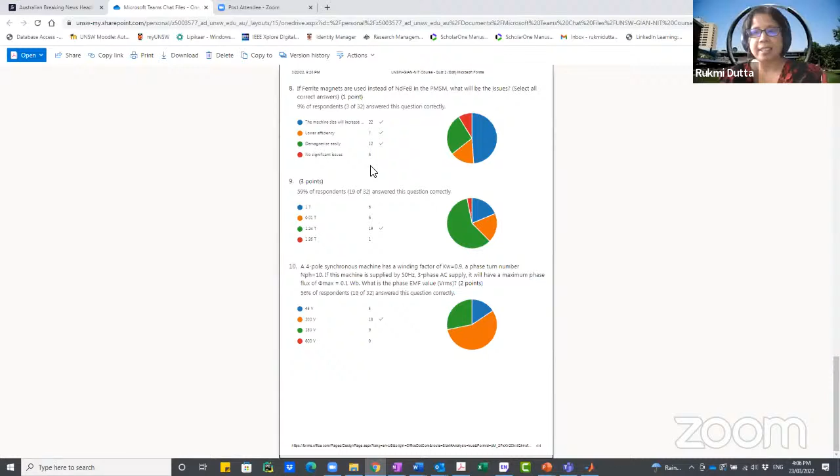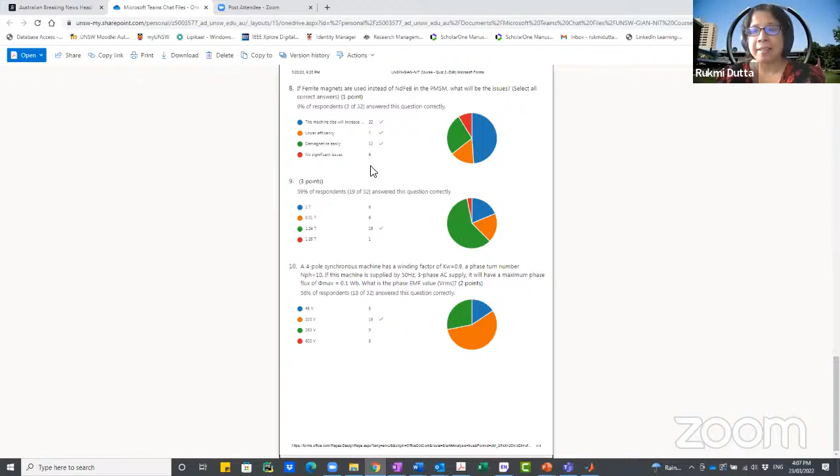Then we discussed a little bit about magnet material. Rare earth magnet material such as neodymium iron boron is expensive, and it can also have supply issues, because it is dominantly available only in China. So if we start using PM machines everywhere, rare earth material could be like the oil of the current age in the future. That's why we do not want to rely on one single country for the supply of rare earth material.

And that's why there was the look for alternatives. So one very obvious alternative could be ferrite magnet, which is cheap and easily available everywhere. But then what are the problems with it? So that was the question. So if we use ferrite magnet, the main problem will be that it has low energy density, so machine size will be much bigger.

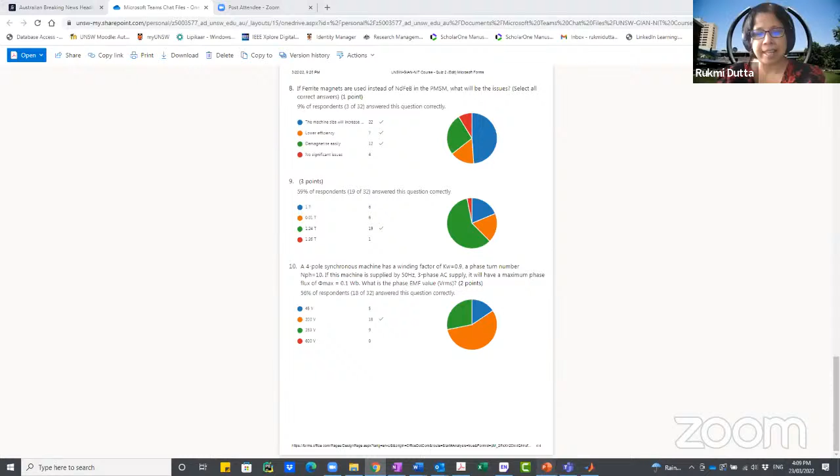And the last two questions were basically two simple numerical questions based on Dr. Clay Chu's tutorial, and in both those questions, the majority of you got correct answers. So I congratulate you. And hopefully today also we will have a very fruitful tutorial as well as lectures. So now let's go to the lecture component of today's part.

Okay, so let me start with today. We are on the third day of our course material, and this is the second part of the permanent magnet machine, where we will be discussing mostly how to design it. We'll start with some fundamental definitions, then we'll go to how to analytically calculate some of the main dimensions, and then we will go into more detail about how to do it using finite element modeling.

So in the tutorial, which will be like a finite element workshop, you will be able to maybe even use some of the concepts that you learn in today's lecture.

Madam, can I interrupt for just 1 minute? Sure. Madam, at the bottom, please see whether recording is going on or not. Okay. This recording, I think, is going on. I cannot see the recording. Yeah, recording is going on, sir. I can see recording is going on. Okay. All right.

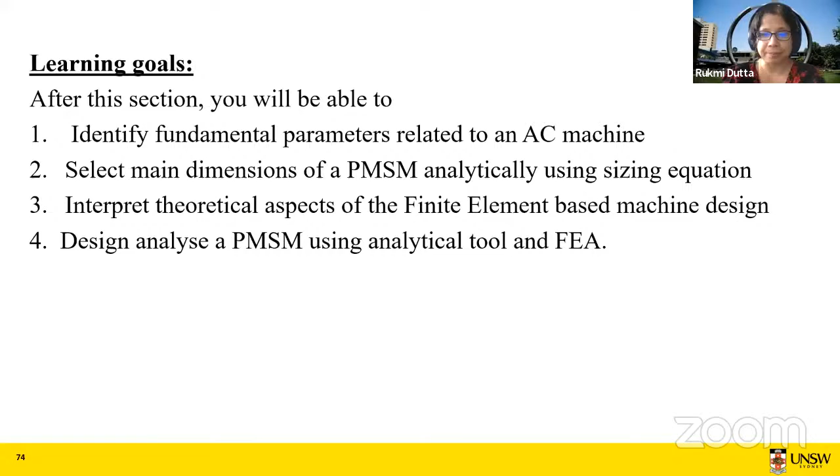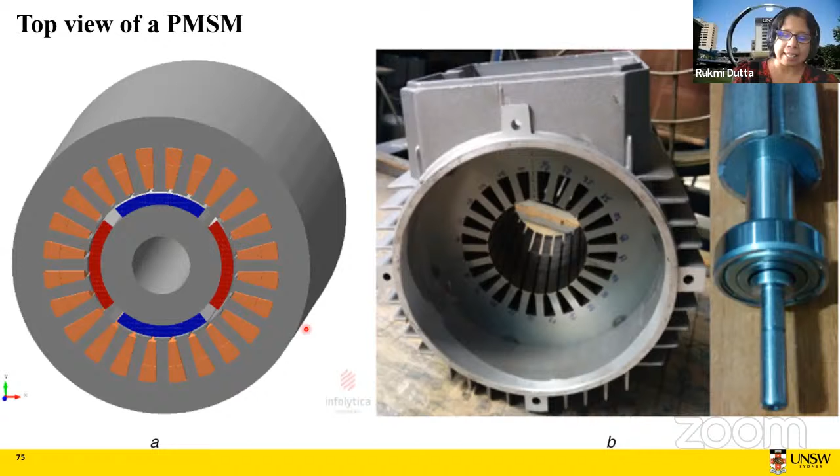So when you want to start designing a machine, the first step is to find the main dimensions, and only after that can we do anything else. The first step is always analytical calculation of the main dimensions, which gives you a very basic machine. You may use further analytical equations to calculate some performance, or you can directly go to finite element and start finding more accurate predicted performances.

Now, to build this geometry, we need to know some of the fundamental quantities and be very clear about them. So first we will look at those, and then we'll move to the sizing equation. So as I said, for the geometry, we have to define the stator. We have to draw these slots where the winding will go.

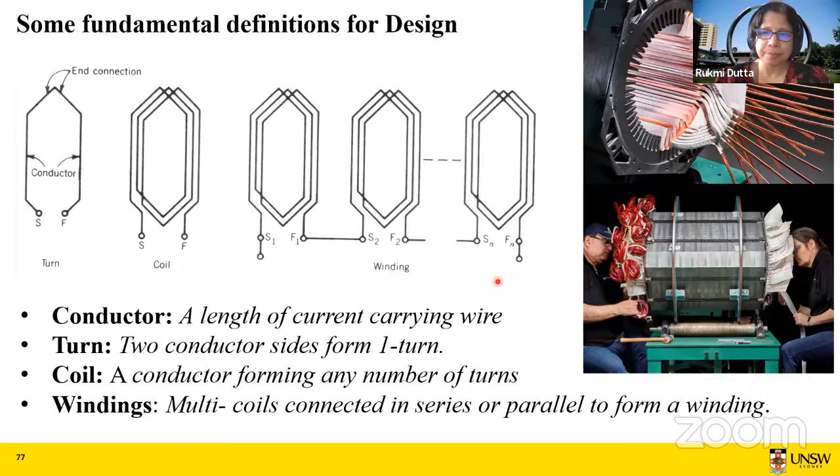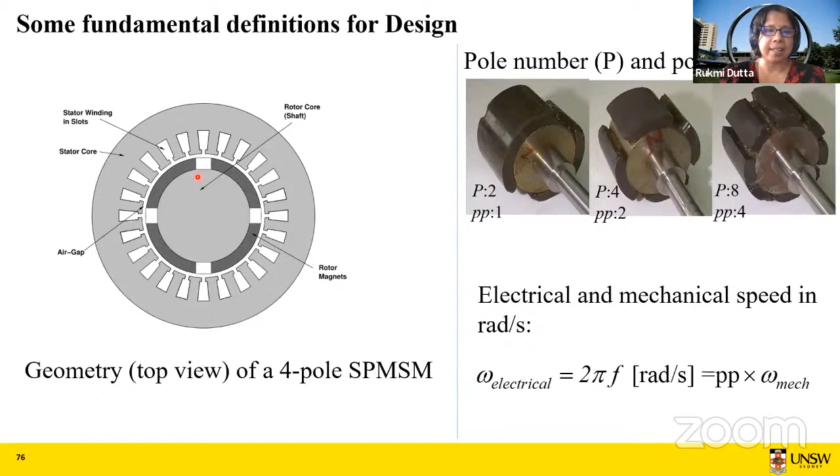And then the coil in your stator. So what's the width of your coil? That's the coil span. If the width of the coil and the pole pitch are the same, then we say that we have a full pitch coil. But sometimes having the pitch shortened is actually useful. By making it shorter, we can reduce certain harmonics in the magnetomotive force and also in the EMF.

If you remember from our last lecture, the magnetomotive force, or MMF, was a staircase type waveform, and it has harmonics. And you do not want certain harmonics, mostly the odd harmonics. Some of the odd harmonics can result in vibration and also noise. So those harmonics can be eliminated using short pitching. Of course, also using a narrower coil, we can reduce copper use as well. So that's the advantage of a short pitch coil, and it's often used for all types of conventional three-phase machines, including PMSM.

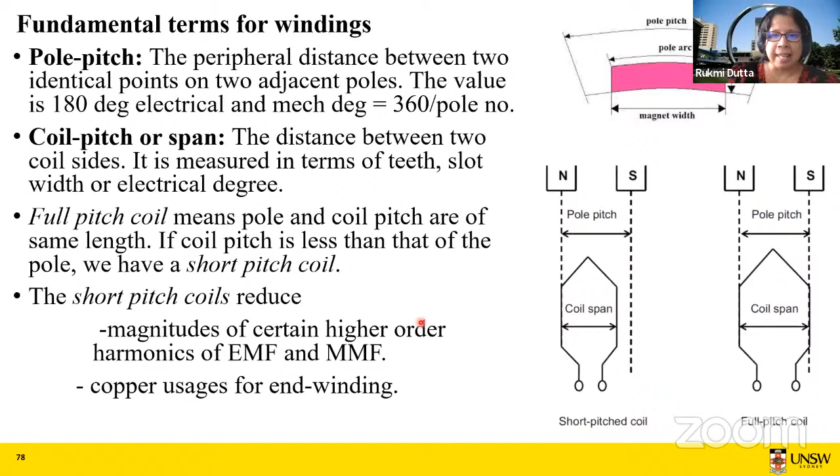So when we have a short pitch winding or short pitch coil, that effect needs to be included in our number of turns per phase, and that is defined by a factor called pitch factor. The basic definition is that it is the ratio of the induced EMF of a short pitch coil as your numerator, and the EMF of a full pitch coil. So if we take the ratio of these two EMFs, it gives us a fraction, and that's the pitch factor. So pitch factor is always less than 1.

But we may not know the EMF before we build the machine. So instead, we can analytically calculate it using a formula. This is a fundamental formula. You can find it in any electric machines book, especially the first one. We can calculate pitch factor for different harmonics of the MMF. If it is for the fundamental MMF, then h will be equal to 1. And it is the cosine function of the angle. So what is this angle? This angle gamma is known as the slot pitch angle.

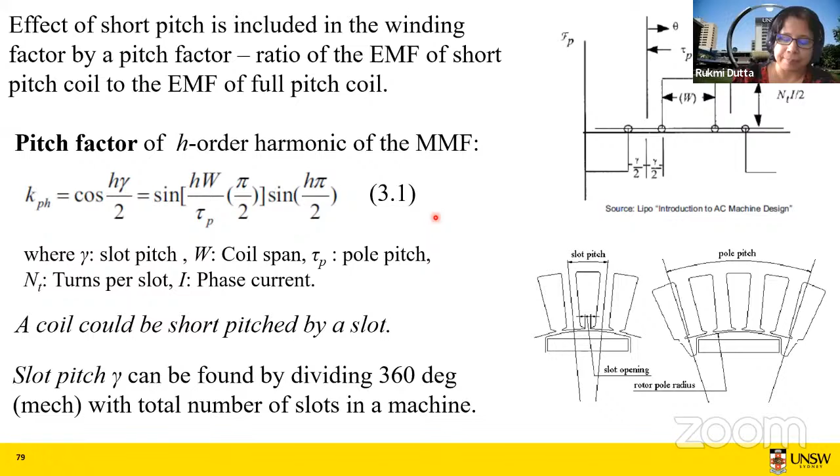The next factor, which is again quite well known, you will find it in the classical electric machine textbook. That's the distribution factor. The distribution factor comes from the fact that all our coils are distributed over a number of slots, as you can see here. This shows us the two sides of a coil, and all these could belong to one phase, and the others could belong to the other phase. So we could have many coils, as I said, and these coils could be connected in series or in parallel.

Is there any question? Hello, is there any question from your side? You please write it down. Let Madam finish, then you can start. Okay, sir. Yeah, hello. Maybe there is just background noise. It could be just background noise. Sorry? Yeah, I think he forgot to mute. So, Madam, please continue. Okay.

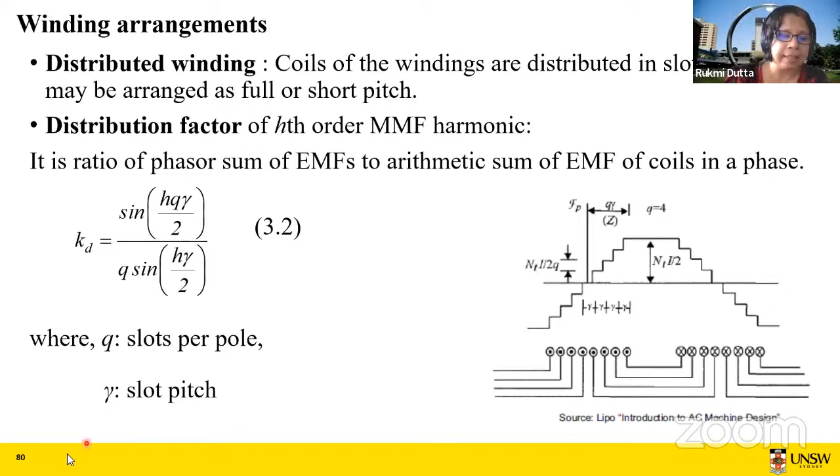So we have two factors from the winding, pitch factor and distribution factor. And then how are we going to put these windings in the slots? Based on that, we have two types of windings, double and single layer. The concept is very easy to understand. If in our slot we only have one coil side, that could be a number of conductors if we have more than one turn. If it is one turn, then it will be one single conductor. In this picture it is shown as only one conductor just for simplification. So single layer means we only have one coil side in each slot, and in the double layer we could have two coil sides, top and bottom. That's why the name double layer.

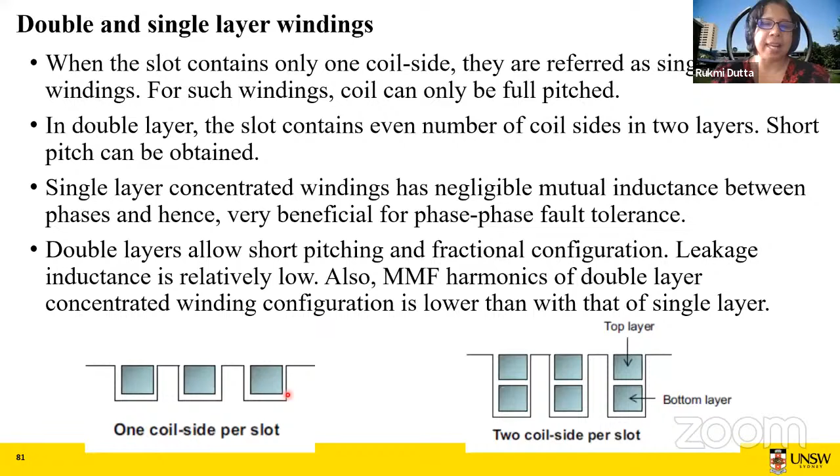For conventional machines with distributed winding, if we want short pitch, then it is a double layer winding. But if we want fault tolerance, then we may select single layer full pitch winding. So those are a few fundamental things. Now we are ready to look at the design steps.

Okay, so what is the first step if we want to design a machine? First will obviously be the application, if we are designing something novel or new. But if we are doing it for conventional applications, then the first question will be, what type of machine are we designing? Is it a synchronous machine, induction machine, reluctance machine, or PMSM or BLDC? So that's the first question we have to answer.

And once we decided what type of machine it's going to be, next we would have to look at whether we want internal pole or external pole. Here internal pole and external pole doesn't mean SPM and IPM, okay? This is a different concept. Your rotor could sit inside the stator hollow cylinder, or your stator could be inside and the rotor outside. If the rotor is outside, that's the external pole configuration.

This type of external pole configuration could be useful for applications such as a racing car, in which you put the electric motor actually in the wheel. The shape of the wheel is such that it is favorable for an external pole machine, because your rotor could be the wheel rim itself, okay, and then the stator could sit in the middle.

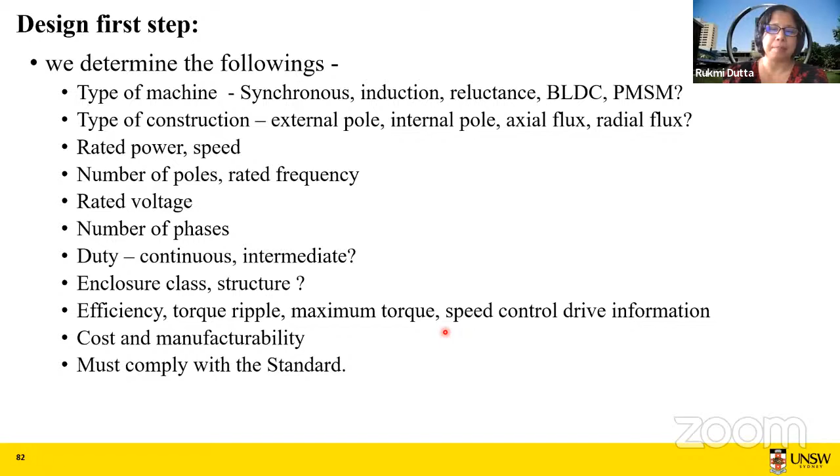So once we have decided what our motor is going to be, the next step is to determine the main dimensions. So what are those main dimensions? One of the important ones is the outer diameter. So from the center of your motor, that will be your outer diameter. And this outer diameter, if we are designing the motor for standard applications, will usually be decided by the standard frame sizes. There are different frame sizes, and that will already tell us what this diameter needs to be.

And the next important one is the axial length of your machine. We also need to know what should be the width of the slot. These are the slots, as you can see. What should be the height of the slot? What is going to be the air gap diameter? Air gap diameter means actually the internal diameter or internal radius of your stator. So here, again, you need to know what this radius or diameter is.

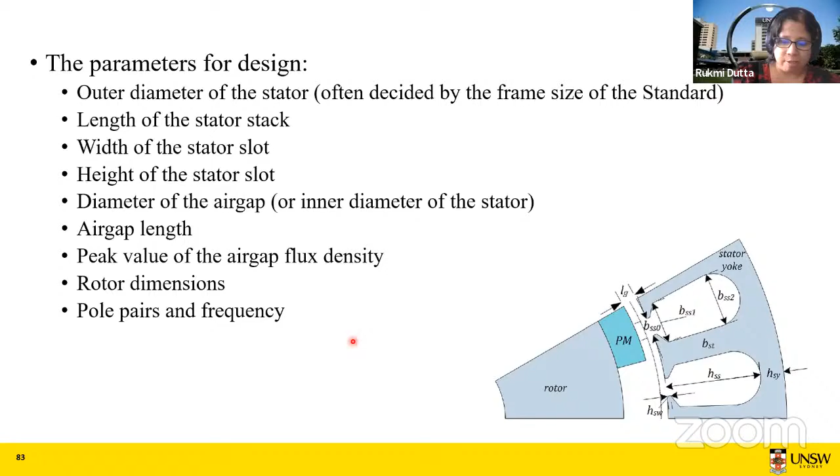So how do I decide it? There comes the concept of the sizing equation. The first step of a machine design is actually always the sizing equation. It may look like a very weird, large, complex equation, but we will break it down, and you will see that although it looks very complex, it actually comes from a very basic understanding of power and torque.

In the sizing equation, on the left-hand side we have the output power of the motor, and then some constant, the efficiency of the motor, frequency, pole pairs, phase numbers, the air gap diameter of your motor. Air gap diameter means inner diameter; we can also call it the inner diameter of the stator. The length of the motor, the air gap flux density, and this letter A represents the electrical loading.

What electrical loading means is again a quite simple concept. It means how much current per meter there is in the periphery of your stator. So if you know your total current, you divide it by the perimeter of the circle created by the air gap diameter.

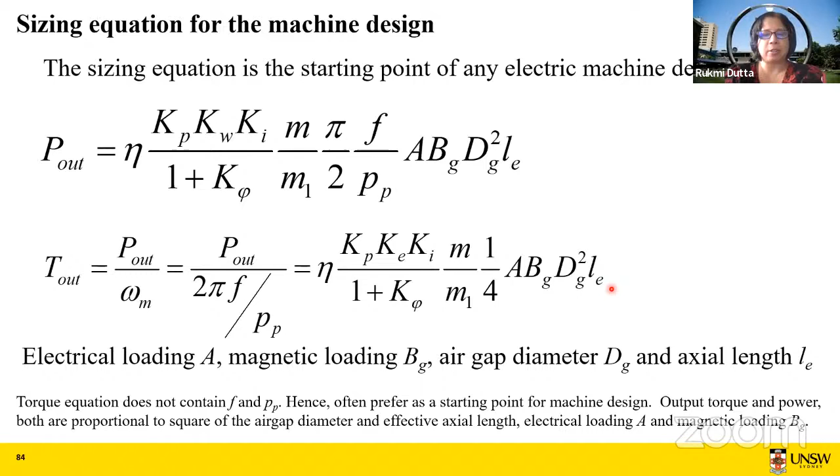So now let's look at where this sizing equation actually comes from. It starts with the very basic definition of power. Instantaneous power, as you know, is voltage times current. Now, if we consider that instantaneous power as our input, then the instantaneous input power to the motor, multiplied by efficiency, gives us the instantaneous output power.

But if we take the average of our instantaneous power, then we get the conventional power equation in terms of either RMS value or peak value. So from here it starts. With the efficiency and phase number, in a time period of capital T, we find the average input power.

In the input power equation, actually, instead of voltage, the EMF is used. So here it assumes that resistive drop or any leakage inductive drop in the machine is negligible. So it's neglected, and from there we get our power equation.

And this equation was derived in 1998 by Professor Tom Lipo, who has only recently passed away, but he was one of the pioneers in developing this equation. And this paper is available in the IEEE Xplore database. So if you are interested, you can always read this paper to understand the sizing equation in more detail.

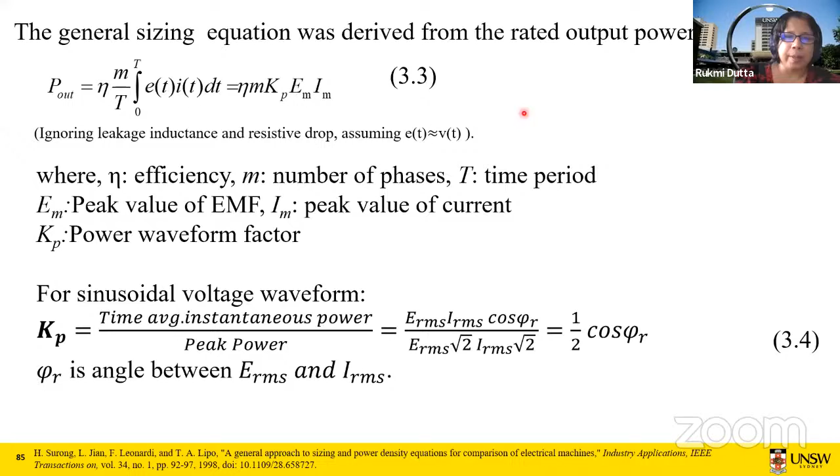So what is the induced peak EMF, and what is the current, in terms of flux density and current density? That will translate to the sizing equation. So EMF, from Faraday's law, can be expressed in terms of the number of turns in a phase winding, air gap flux density, frequency, pole pairs, and the flux is, as we know, flux density times the area.

From the concept of the area come these two dimensions, the air gap diameter and the length. The cross-sectional area of the air gap can be thought of like a cylinder with a curved surface. So that area is 2 pi r times the length of the cylinder, which is the length of our machine. So from there come these two, diameter D and length L.

And since our windings are distributed, we have to consider the winding factor. In yesterday's lecture we didn't look into what is inside the winding factor. Now we'll be able to do that. If you remember the distribution factor, which we defined previously today, and the pitch factor, those two multiplied together are the winding factor.

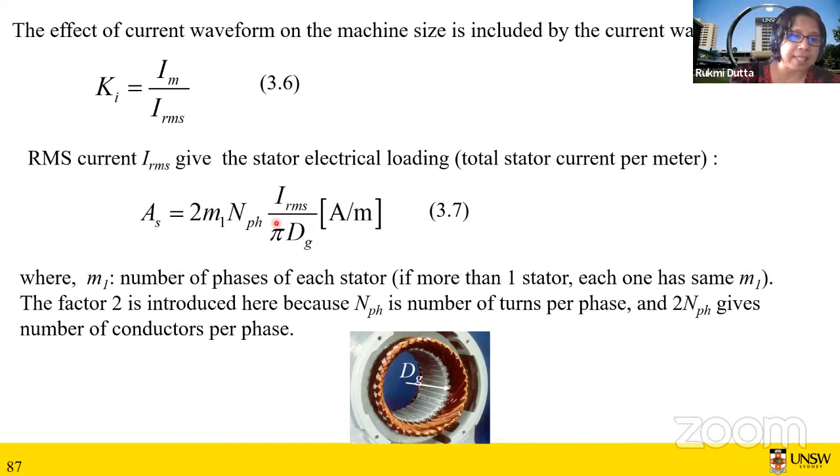So the peak current we can now express in terms of the total current loading times the current factor. So we replace our IRMS from the equation here. IRMS was in terms of current loading, so we can define IRMS in terms of current loading from this equation and bring it back to our peak current definition.

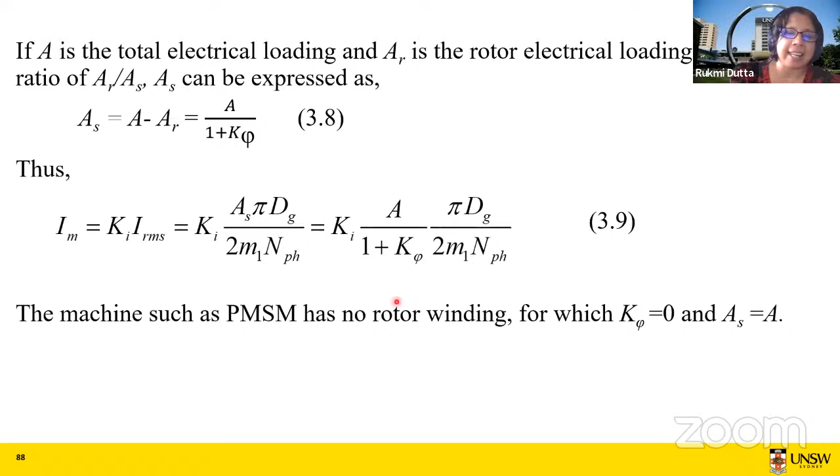So peak current is current form factor times IRMS, and IRMS is replaced by the current loading, and we can replace the current loading of the stator by the total current loading. So then AS becomes A over 1 plus K phi. This is a general expression for any electric machine. And so now in our power equation, we replace our EMF by the one we found from Faraday's law, and we replace our peak current with help of the current loading. And now you can see where those constants are coming from.

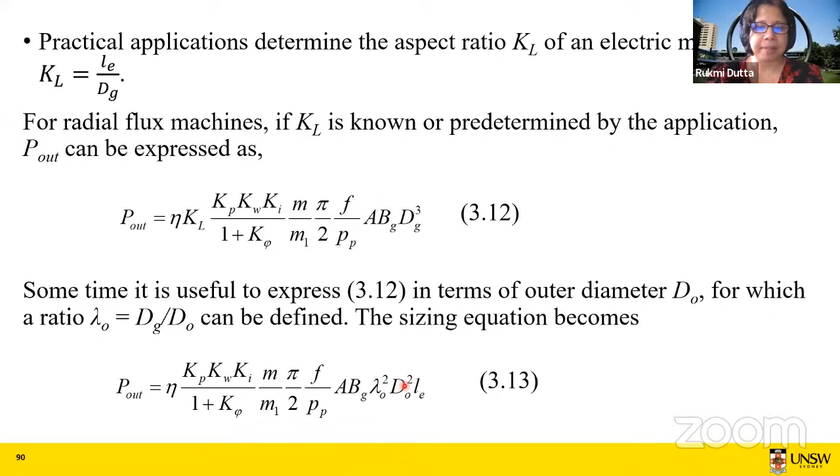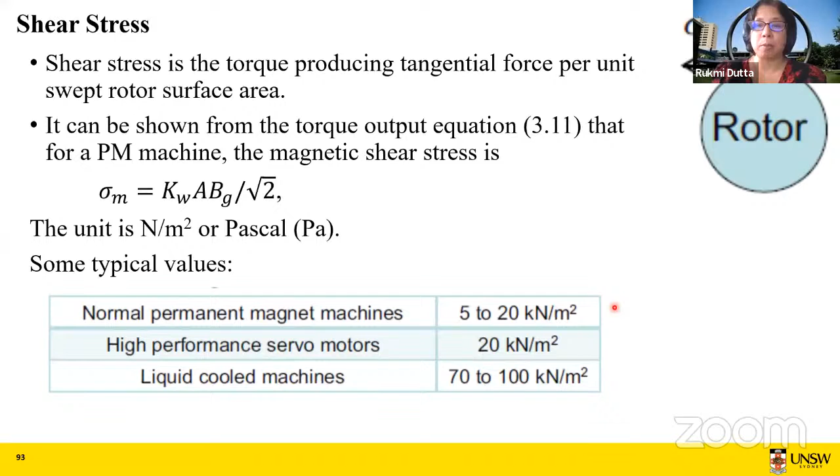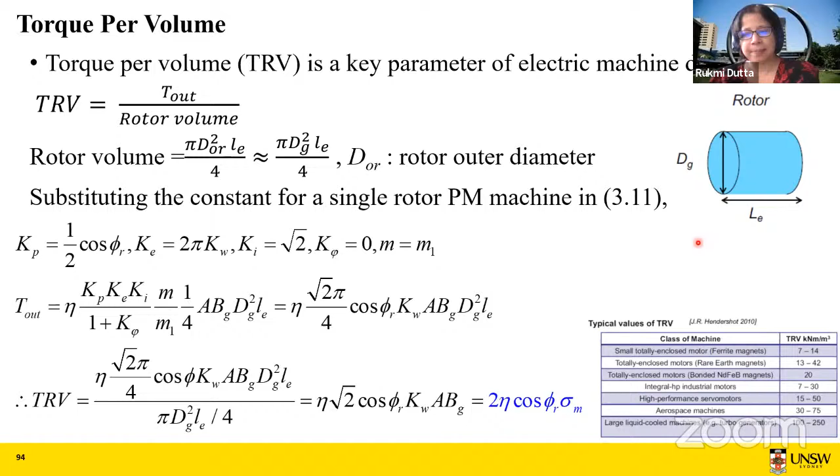As you have seen in the sizing equation, if the frequency increases and your power is kept constant, and these two, the electric loading and magnetic loading, are fixed, then the air gap diameter and the length need to go down. This volume needs to go down. That's why for a high-speed machine, the rotor and stator are usually both very small for the same amount of power, and that means the stress on the rotor would be very high. If we do not give it proper consideration, we could build a machine which will break once you start running it. So that needs to be kept in mind.

And then the winding, how to distribute your phase windings, needs to be known. We always start with a positive side of our winding, and then since the other two phases must be 120 degrees electrically apart, that determines where should be the next positive of the second phase and the negative of the third phase. So this is always known for a 3-phase machine. And based on this, the coils can be distributed in the slots quite easily for each phase. So it's showing how you will decide where the phases will be in your slots.

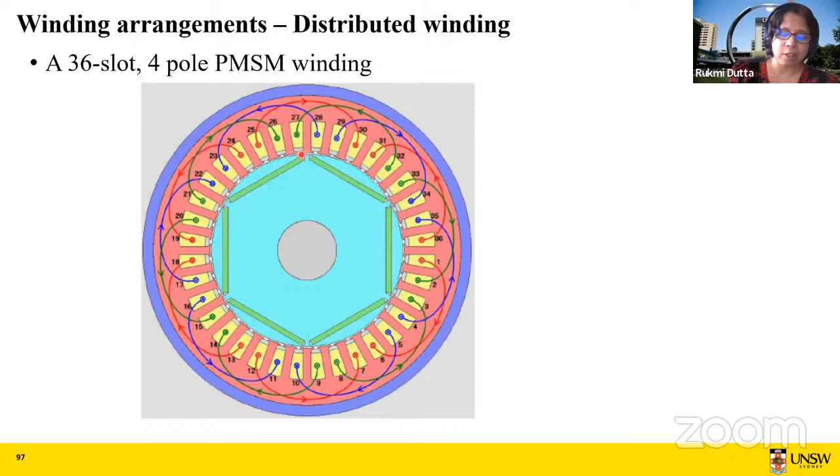If you are doing, let's say, finite element analysis, you have the geometry. Now you have to assign the phases to the various slots, and that can be found through that quite well-known relation. Other than that, concentrated winding we talked about, you can see how they are different between distributed winding and concentrated winding. And concentrated winding could also have a slot per pole per phase that is not an integer, it could be a fractional number.

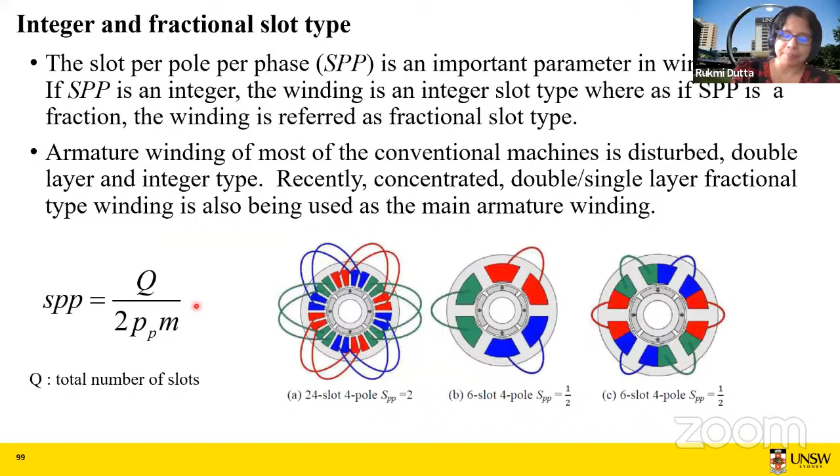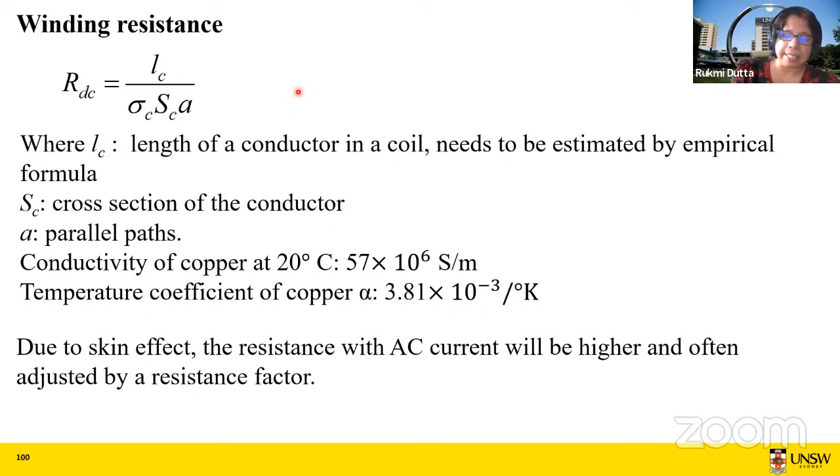And once we know the length and cross section of our windings, we can initially calculate what should be the resistance of our windings. So these are a few things which we can easily calculate analytically, but if we want to do more performance analysis, usually they are not accurate because we are ignoring magnetic saturation, leakage, complex geometry, etc. And we need, in fact, finite element.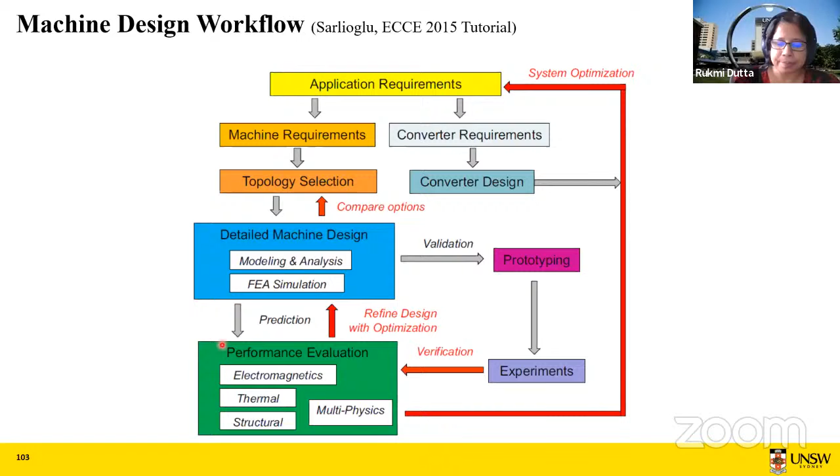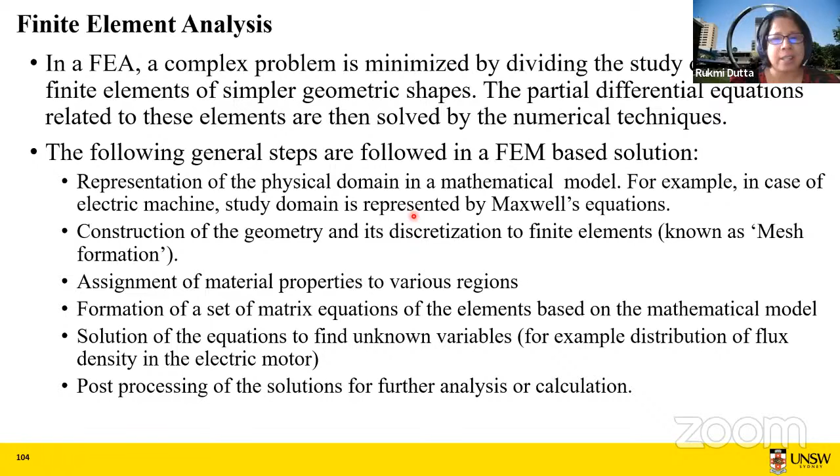Finite element is actually not just for electromagnetics. It can be used for civil engineering, mechanical engineering, whoever needs to solve partial differential equations, okay? For electric machines, it becomes the partial differential equation solver, and that partial differential equation is Maxwell's equations. So that's what the finite element does in machine design. It solves Maxwell's equations behind the scenes. If we recall quickly, these are Maxwell's equations of magnetics: the curl of H is the current density and the div of B is 0.

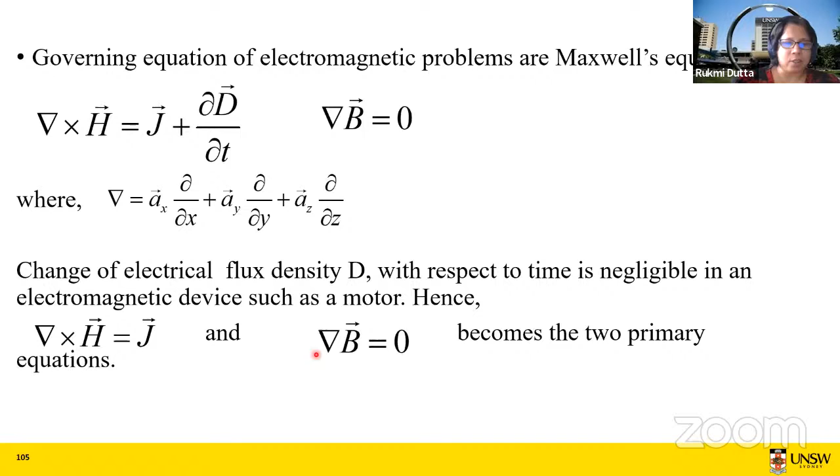Now, usually in the electric machine, the change of the electric flux density D doesn't need to be considered. So this part can be neglected when we are doing our electromagnetic analysis or Maxwell's equation solving. That simply becomes the solution of curl of H and div of B.

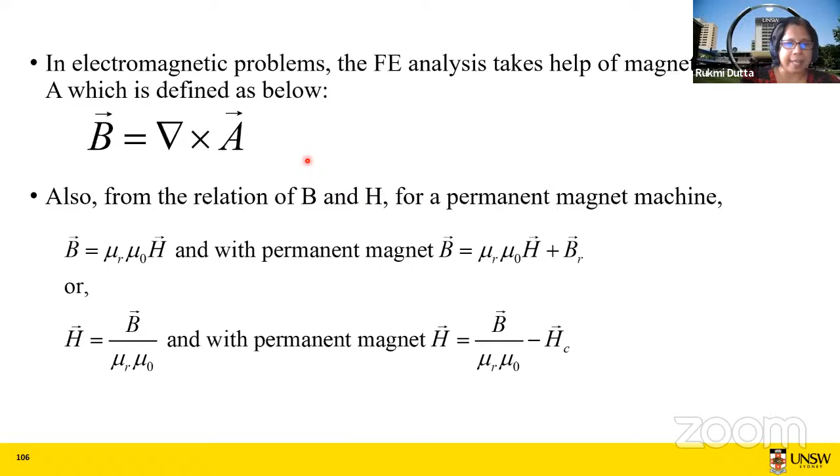So, and then B, if you recall from the fundamentals, the flux density B can also be found by taking the curl of the magnetic potential. So in fact, in many finite element analyses, they try to solve this magnetic potential, so these are all partial differential equations.

So they will solve it, and then you can find the magnetic potential. If it is a Cartesian coordinate, you can find the components x, y, z for flux density: Bx, By, Bz. And then from there, you can calculate the radial flux density as well, because conversion from Cartesian coordinates to radial coordinates can easily be done.

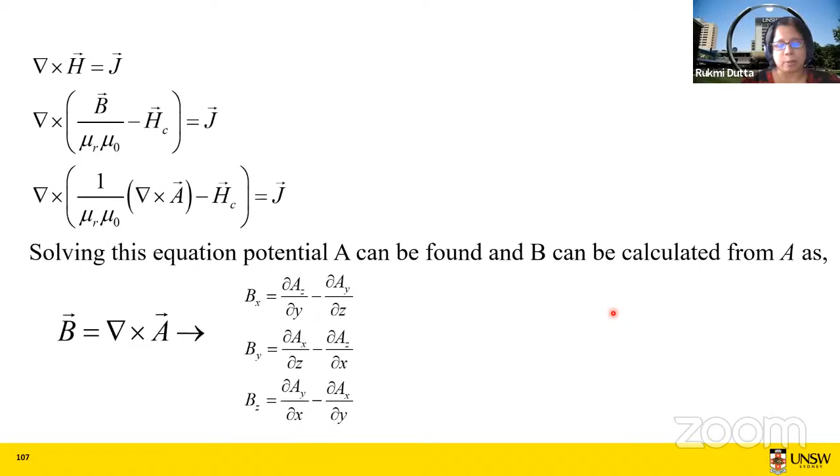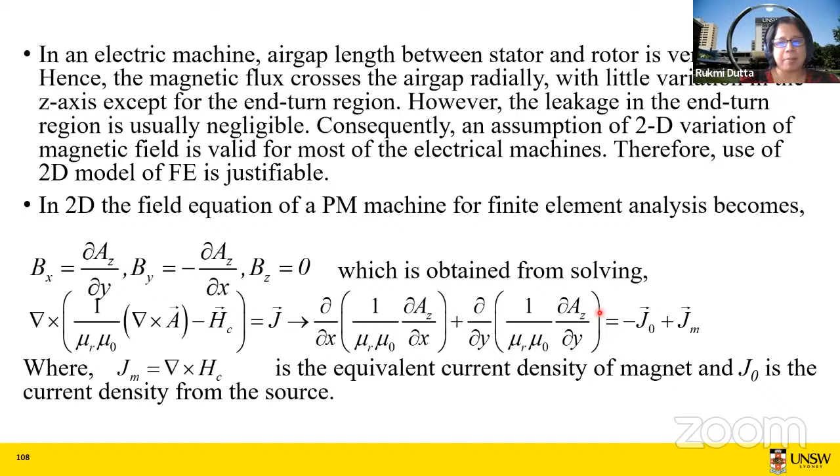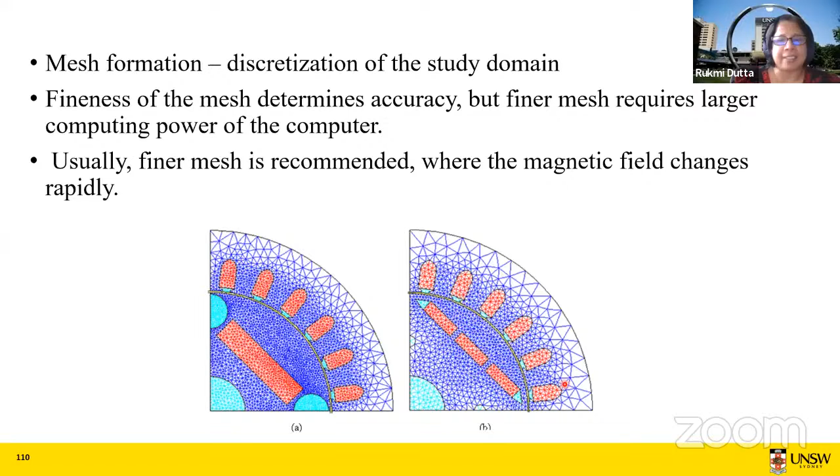So you divide the study area or domain into smaller elements, and then you solve those equations in each of these elements, and then find the value of B or the value of A in X direction, Y direction, or Z direction, and so on. So these elements could be two-dimensional or three-dimensional. If we have a 3D finite element model, then the elements could be three-dimensional, hexahedron or tetrahedron, and the geometry of this will play a part when you try to solve those equations in these nodes, okay?

The good thing is that in most of the commercially available finite element software, you just need to select how accurate a meshing you want, and then it does all the things for you. It will select whichever element gives the best accuracy, and accordingly it will mesh your study domain, or divide it into smaller elements, which in FE terminology is meshing. It's called mesh.

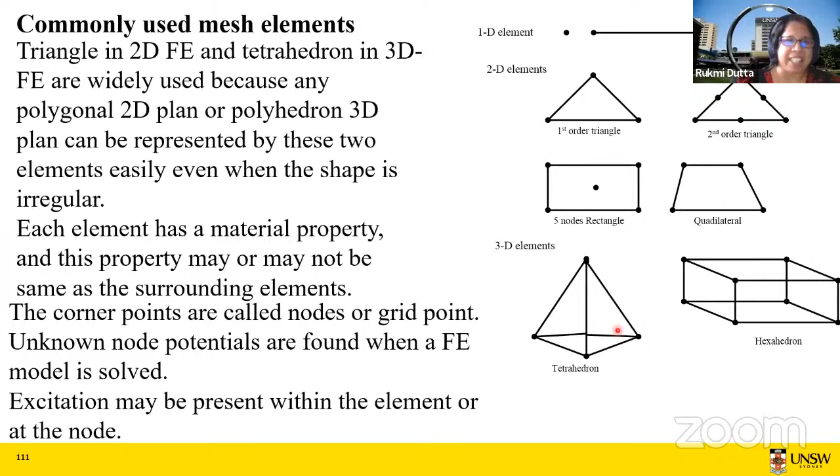So you are seeing here an example, a triangular element, and at each node, how it calculates the potentials, okay? And in fact, it becomes quite a complex matrix as well, because it does the solutions in matrix form and then adds them up. So the maths behind it is quite complex. If someone wants to develop finite element software or work in finite element software companies, then you have to know all this. But if you are just a user, then you may not need to know what's happening behind the scene in the solver.

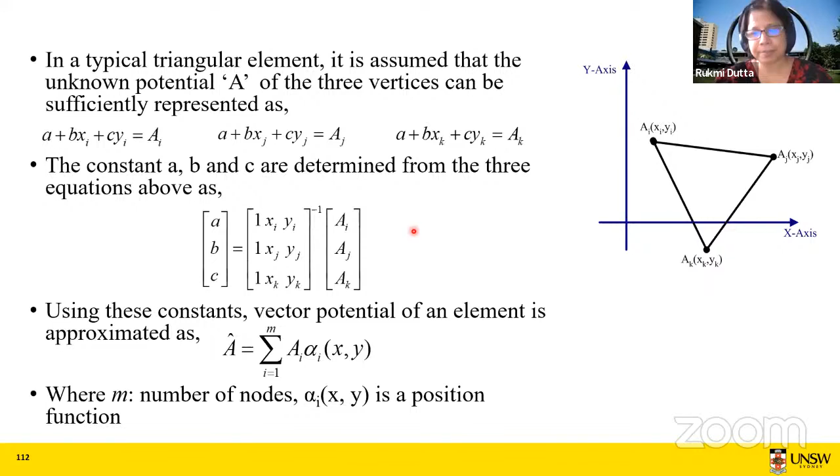So as you can see, it has to solve a partial differential equation in so many small elements. It's definitely very, very time consuming. So how to reduce the time? There is actually quite an elegant way to do it, especially in electric machines, because in electric machines, we have symmetry. Okay, so if we have 4 poles, each pole is identical to one another.

So when we do finite element analysis, we don't have to build a full motor. We can simply build one pole, okay? Or sometimes they even do half a pole. Sometimes even half of the pole is sufficient. So we build either half of the pole or just one pole. And whatever is under one pole, we include that. This is the slot per pole.

So for example, this particular geometry is an IPM geometry, flat magnet IPM geometry. Under that, we have 6 slots. And out of these 6 slots, 2 slots will be for each phase. The first one could be our A positive phase. Next 2 could be the negative C phase, and these 2 could be the positive B phase, and this could be our A minus.

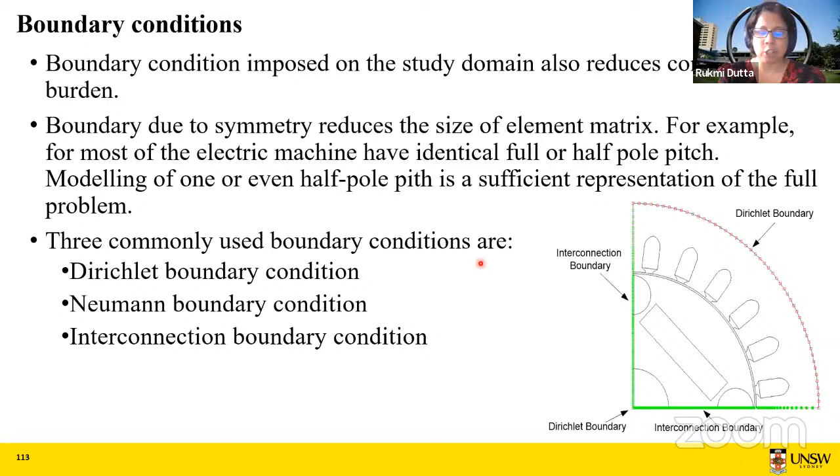The other 2 sides are called the interconnection boundary. This type of boundary defines the periodicity, because this is going to repeat. If we have 4 poles, this structure is going to repeat 4 times. So the 2 boundaries tell the solver that whatever you are solving here is going to repeat in the next poles. So it only solves this and then duplicates it. So ultimately, we get the result for the full geometry, although it solved only for 1/4. That's how it reduces the time.

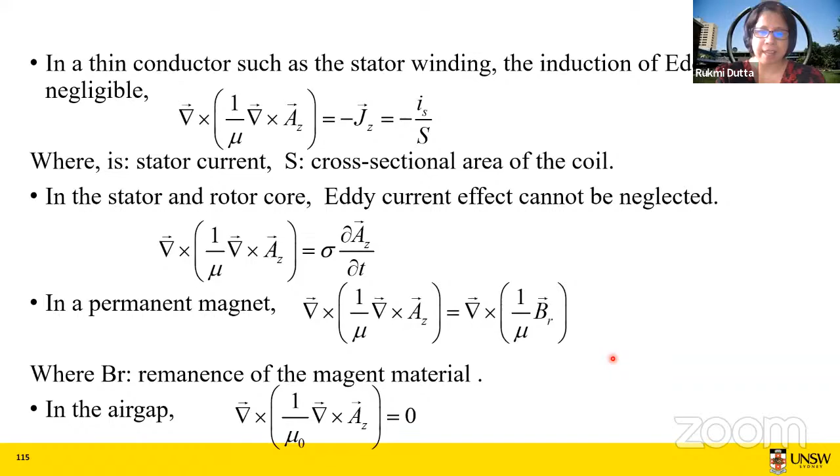And often there are quite a lot of other things to be considered, such as if you want to calculate eddy current loss, then those equations need to be able to handle the eddy current loss calculation from the flux density and the potentials. And when we simulate the rotation of the rotor in finite element, as I mentioned earlier, the time step, again an elegant way is there which reduces computational time. This is quite standard in most commercially available finite element software.

So only your rotor part is going to rotate, right? And your stator is stationary. And when it rotates, no shape change can occur, because physically, when your rotor rotates, no shape change happens. So that's what we also need in our finite element. So how to do that? Because we are only moving part of a geometry. The clever way is that the air gap is divided into 3 sections. The top part is assigned to the stator, the bottom part is assigned to the rotor, and the middle one is the air gap.

Actually all 3 are part of the actual air gap, but the calculation only happens in the middle portion, in which they can modify the mesh elements when the rotor moves, but not the top part connected to the stator or the bottom part connected to the rotor. So the mesh of those 2 parts remains unchanged when the movement of the rotor is simulated in the finite element.

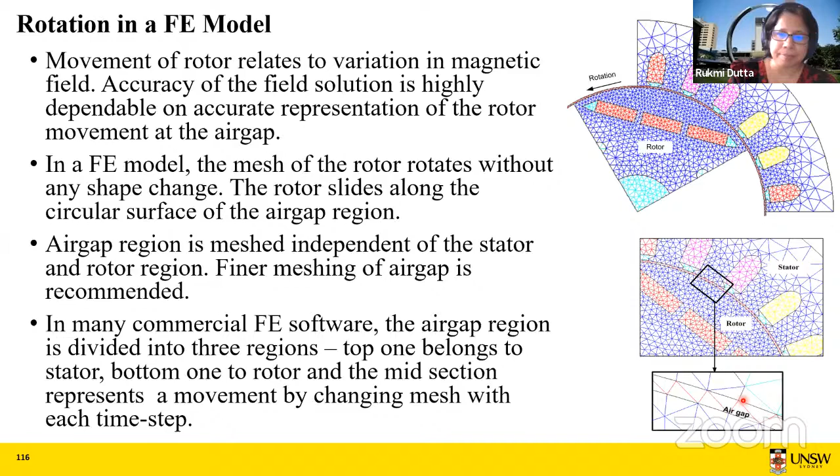Sometimes some finite element analysis, in fact, allows you to connect the model, the finite element model, to a circuit representation of the input. So current input to your coil can be represented by current sources like a circuit. The coil here is actually your phase A, phase B, and phase C. And these are the representation of the inductance of your winding, and this will have a link also to the geometry that you have created.

And again, this interface happens actually behind the scene, but we can draw this kind of a circuit, and then we can assign this coil A, B, C to the slots. Okay.

In some FE softwares, you don't need to define a circuit like this. Everything happens in the geometry. So they just provide you an input box in which you can include your current. You can include number of turns. You can even include any leakage inductance, which is in the Z direction, if you are using a two-dimensional finite element. If you are doing two-dimensional finite element, we are not looking at what's happening in the axial length, right?

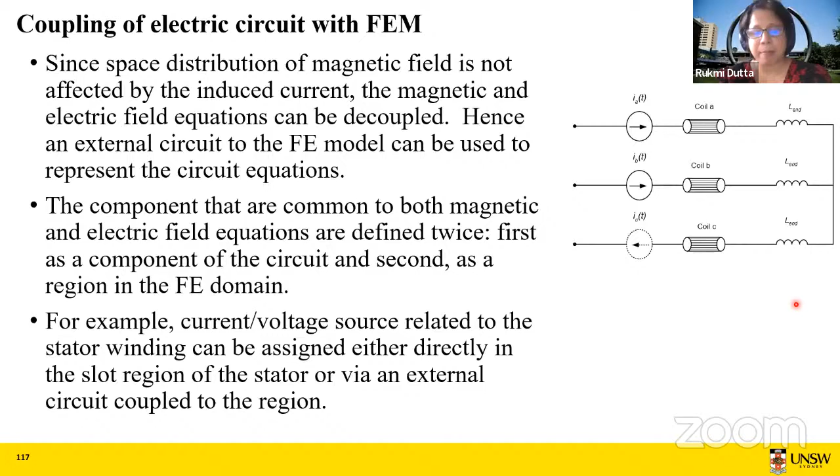Also, instead of putting this three-phase current source, we can even put an inverter model here if we want. You can even have the controllers there. So we can elaborate if we would like to do it that way. So the motor model is your FE model, but the circuit, controller, etc. could sit in another interface, and in many software both of them can be coupled together. So your controllers run in one platform and your FE runs in the other platform, but at the end you get the performance results out from the FE.

So to show you an example, the same IPMSM geometry we're seeing here. So that geometry will be built. We assign various materials once the geometry is built. Magnet material, rotor and stator will be steel material. Windings will have copper in them. And then the shaft and the flux barriers are non-magnetic. So they can be represented just like air, or any non-magnetic material we can select.

And then we give a command to the FE software, which will build a mesh for us. We can ask it to be very precise or very dense in the area where we want more accuracy. So usually the action happens here in the air gap. So we want that part to be densely meshed compared to the yoke. Here, nothing much happens, the flux just goes and then comes back. So that's why the meshing here is usually much less dense. If you want to know more about what's happening in a magnet, you can also make the magnet meshing more dense, and that can be done in the software by selecting certain settings.

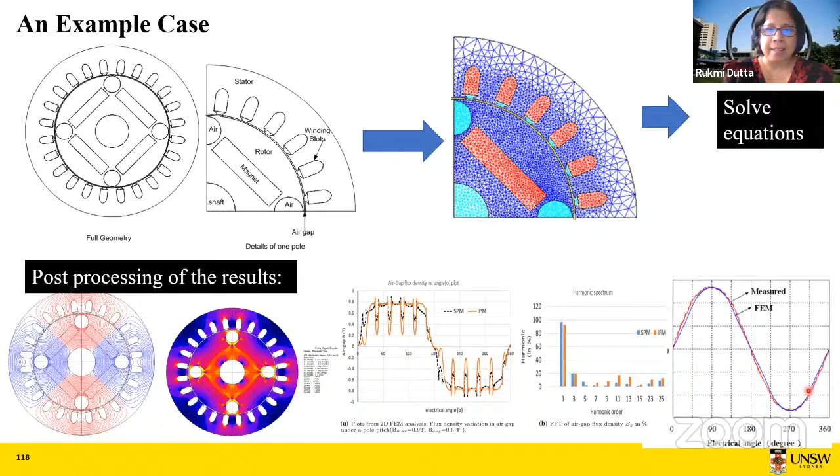So that brings us to the end of these 2 hours of lectures. In summary, you have learned the sizing equation, and that could be used to find the key dimensions. But then we can use some analytical equations to calculate performance, which we haven't discussed here, but in the literature they are available. However, most of those analytical calculations cannot handle magnetic saturation, leakage flux, or iron loss calculations. And they're also not very good when the geometry is complex. So then the alternative is finite element.

It gives you very accurate prediction, but of course it is computationally heavy and could take a long time to process, especially if you're optimizing. It has to do this geometry maybe 100 or 200 times. So it could take even 24 hours sometimes, and if you are looking at not just electromagnetics but thermal and mechanical, it could take even 2 to 3 days if it is very complex. Maybe Dr. Chu will tell you when he was optimizing, sometimes his optimization ran for days.